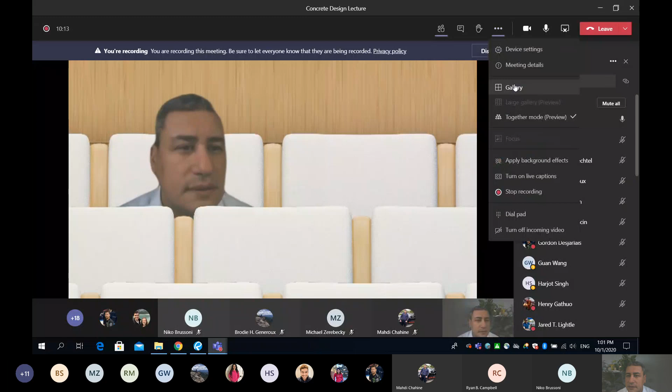Okay guys, let me ask you, does anyone have any question from last class? Does anyone have any question from last class? Guys, you're so quiet, no questions so far? Everything okay? Are you doing well? No questions yet. Why not?

I didn't get you, is it how are you doing? I'm okay. Well, you were just in the movie theater. What happened to the movie theater? I thought I was going to see all your pictures in front of me, but it looks like I'm a student in the middle of the class. Oh, I thought we were at a movie. What movie are we watching? That's not a movie, that's something like an option on MS Teams. You go from here, to gallery, to together mode preview. And I thought when I do that I'm going to see all your faces sitting on a chair in front of me, but it didn't happen. It's only myself on one of the chairs. Thought you were taking us to a movie. That's too bad, another hot date.

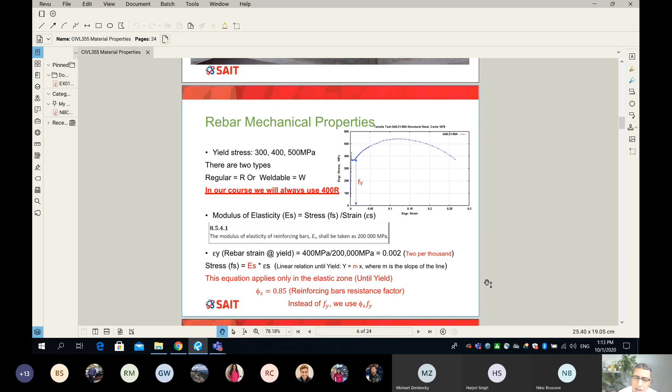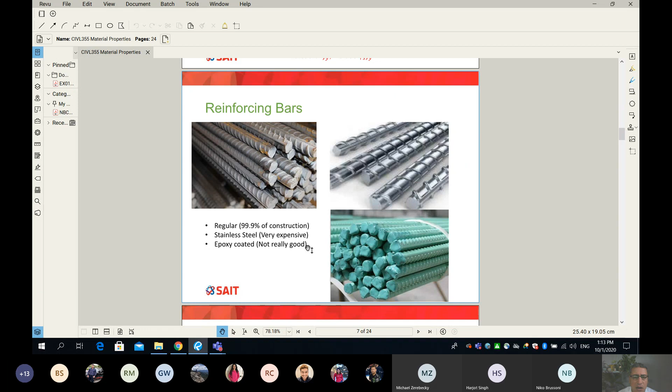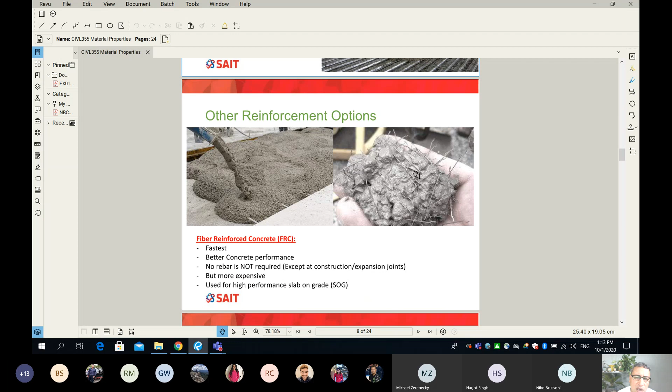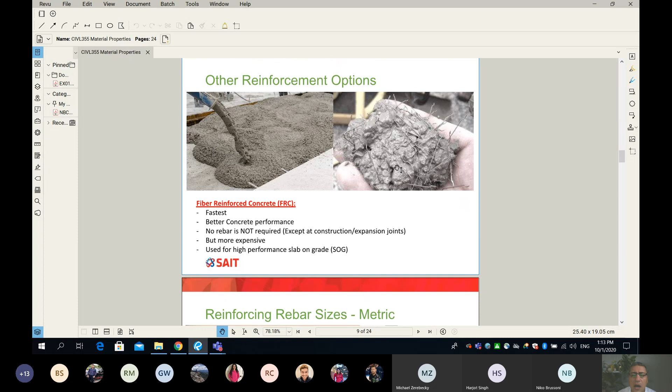I don't want to cover this again. This is about different kinds of steel and which ones are more popular or cover most applications. I've given some clues about where they're used and their advantages and disadvantages. We also talked about the fabric or welded wire mesh and where it's used, and the fiber reinforcing option, which is expensive but very fast because you don't have to lay or tie any rebar. You just place concrete and pour it. Remember, you only need rebar where you have a construction joint or expansion joint. I think this is where I stopped last class, and hopefully we didn't waste too much time just waking you up and reminding you what we covered.

So this table, guys, is very important. You'll use this table in my class probably 1,000 times, unless you're able to remember the numbers, which is very easy. This table tells you the available bar numbers in Canada - metric bars. In Canada, we go from the tiniest one, 10M, in intervals of 5 millimeters, so 15M, 20M, all the way to 55M.

I want to mention something about the 55M. I'm not sure if any of you have seen a 55M bar - this is really a heavy bar. If anyone has experience going to sites and working with rebar, please raise your hand.

Okay, Domenico, let me ask you - keep your hands up, it's okay. It's not a question, just a discussion, so no marks here. I want to ask: if you've been to a site, what is the biggest bar you've seen? What's the largest diameter you've seen on your site?

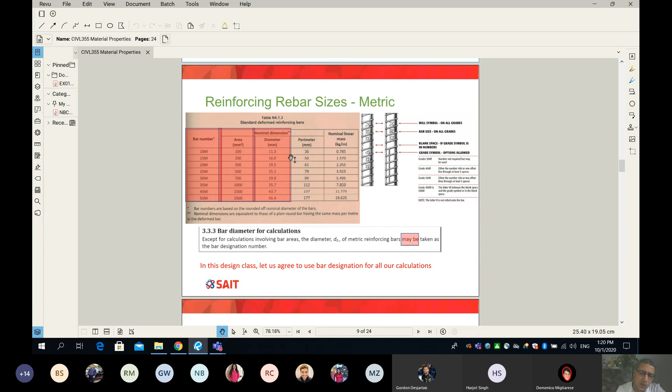Okay, dokie. Let's move on to this table. I'm not going to spend any time on this. This is the rebar in the States, because some of you may work in the States, or sometimes you get some shipment from the state and you need to understand what it means if I say number 3. Number 3 means 3/8 of an inch, which is 9 point something millimeter.

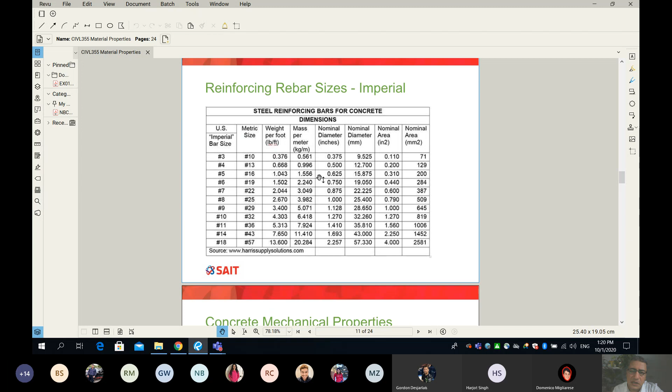Okay, now I guess this is the brand new part. We never came to this point last class. So this, guys, is the same discussion, but it's kind of reversed—instead of applying tension on a piece of rebar, we apply compression on a cylinder or cube of concrete.

We have another machine that only measures the stress, which is the force. Not exactly the force is the stress, but if you measure the force and divide by the cross-section area, you find the stress. But the other machine doesn't measure any strain.

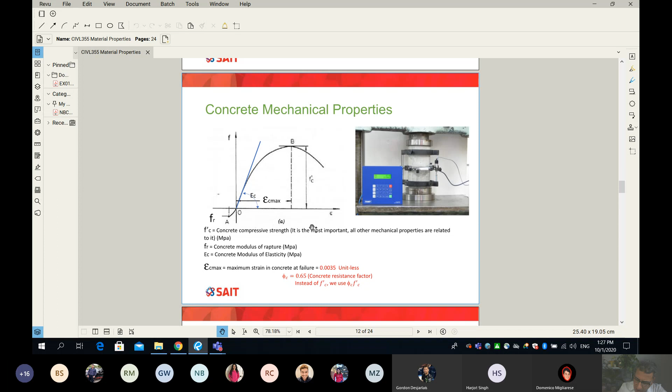Are you guys following so far? I need to hear some noise. Yes, okay dokie, thank you. Anybody else?

Just one? We're listening. Okay, sir, thank you.

As I said a minute ago, the good news is all the mechanical properties of concrete are related to FC dash. Which means if I get concrete FC dash and know how it performs in compression, right away I know how much it can take in tension and all the other mechanical properties.

I'm going to start with the modulus of rupture, coming from the code on item 8.6.4, called modulus of rupture of concrete. The code provides a simple equation, 8.3 on my slide: 0.6 multiplied by lambda multiplied by the square root of F prime C. Everything's clear except lambda.

So what's lambda? It's just below, item 8.6.5, modification factors for concrete density. You know concrete can come in different densities: high density, medium density, normal density, or low density. In that class you learn how to make it high, normal, or low density, and some people did research on that. But take note, in our class we always use normal density.

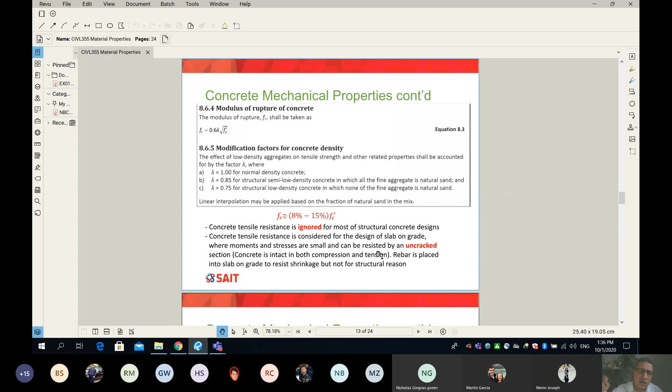Okay, so guys, what I said is already in the slide under statement number 2. Okay dokie, now let's go to the second mechanical property. So the second mechanical property is modulus of elasticity.

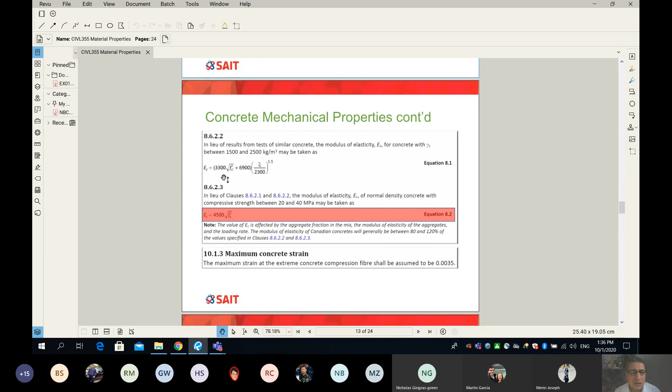Modulus of elasticity, and under 8.6.2.2, the code gives you an equation on how to find the modulus of elasticity E sub C, which you can see is not really a very friendly equation. I'll give you a few seconds to look at it. It's here, so here is the equation.

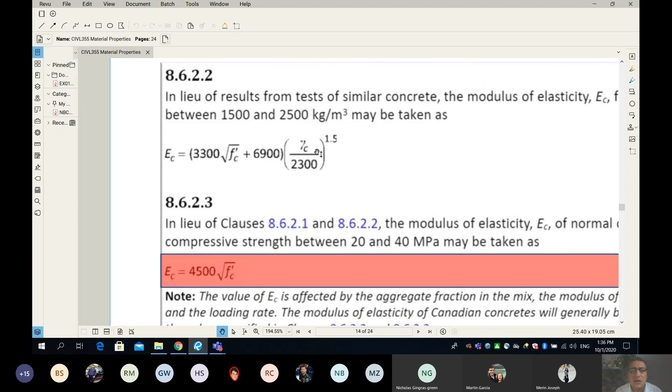Not really nice. It's a function of FC dash as we expect, and also gamma C, where gamma C is simply the concrete density. Okay, so the code says if you want to find E sub C and your concrete is normal density, like our case, and your FC dash is between 20 to 40, then you can simplify this equation to the one I highlighted in red here.

So this one is easier, huh? Just 4,500 square root of FC dash. Okay, now something else you probably want to take a note of.

Okay, anybody, guys? Again, I'll ask you the same question. Anybody has worked on some construction sites? I'm not sure, sometimes you work on a construction site but you don't get to understand and know what the concrete strength is. Like how much, say you're pouring a beam or a grade beam today, or a slab or whatever. Maybe while you're on site you don't focus so much on what's the strength. But let me ask you, if you have this experience, in a normal situation, what will be the typical FC dash?

Concrete compressive strength - have you ever seen 70 MPa or 60 MPa or 80 MPa on site? It depends on what kind of site you're on - residential, commercial, or industrial. Residential is kind of more relaxed on strength, because it's just a house, commercial is sometimes funny.

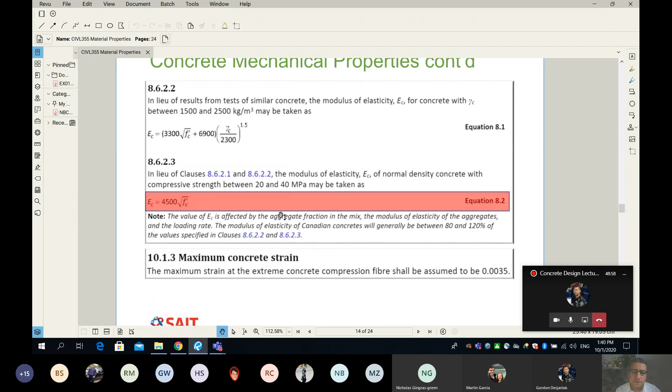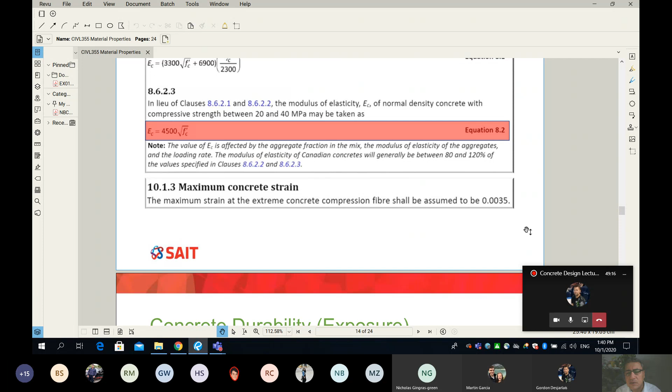Also on the same slide, I gave you this number before, 0.0035. It's not really my choice, this is the code. The code under 10.1.3 talks about the maximum concrete strain, epsilon C maximum, which is 0.0035, 3.5 per thousand. Very important number - we will use it so many times shortly.

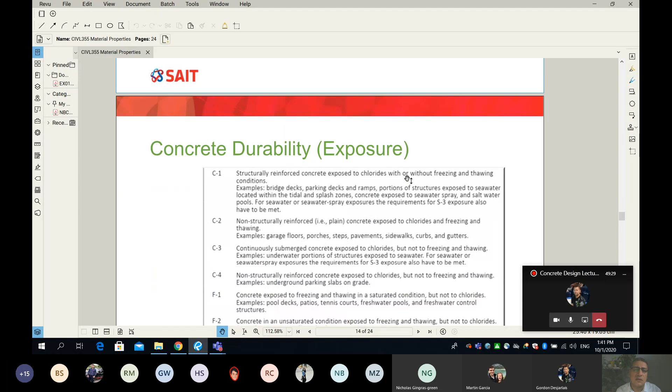Okay, we have a topic - I know you've seen this table before. Anybody want to raise their hand and tell me when did you see this table before? Rudy, go ahead. Mix designing. Absolutely, so thank you so much Rudy - couple of marks for you.

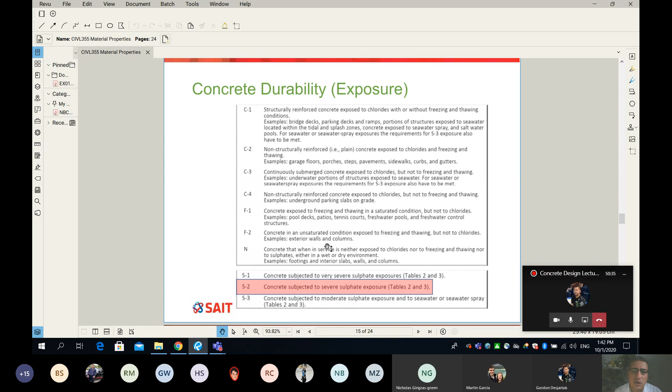So what happened is true, this table was part of the mix design, because when we design mixes we have to look at the durability requirement, and durability in plain English is the long-term performance of concrete. What happens to my concrete after 5 years, 10 years under exposure to chloride, cycles of freeze and thaw, or maybe sulfate. The way we do it is we look at this table, which comes from the code CSA A23.1.

I'm not going to spend a whole lot of time on that because I have other topics to cover, but just a quick reminder because I need that. For example, let's say I'm designing a building, and the building has a wall or a grade beam, and the soil report says your soil has a severe amount of sulfate.

As soon as you hear the word sulfate, it's not really a friend with concrete. It simply interferes and interacts with concrete and creates a kind of gel, and there will be some cracking - it deteriorates the performance of concrete in the long term, so you have to be very careful.

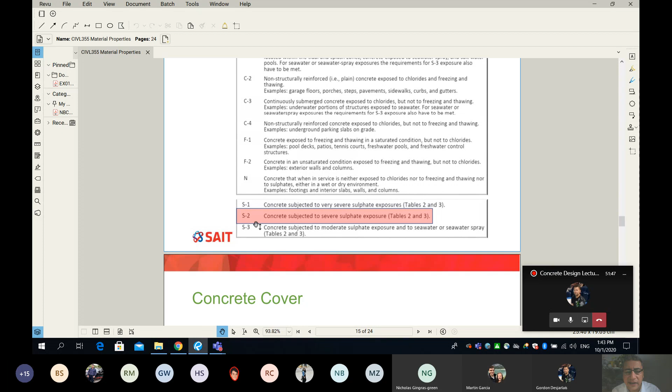So what we do is we look at this table here, and because we got the information that my soil has severe sulfate, then my concrete, which will be in contact with or exposed to this kind of soil, must follow and satisfy the requirement for S-2 concrete. So the exposure here is S-2. Then what do I do when I know my concrete has to be S-2? Maybe you don't feel it much for now, but you will see - here we go. Number one, looks like I need to provide more protection for my rebar.

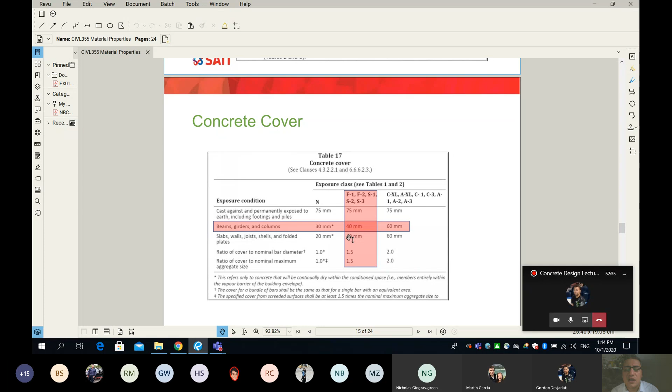So if you have concrete which needs to meet the requirement of S2, and it's a grade beam, as we said, it's a beam here, it means your concrete cover must be 40 millimeters. Look at my row and column - this is how we find the cover. So that's one thing you must do, you must maintain the minimum cover according to the exposure.

What else? You have to keep going and look at other tables from the durability table. So if your concrete is S2, or has to meet the requirement of S2, then number one, your maximum water-cementitious materials ratio has to be 0.45 - it cannot be more than that. In addition, your minimum strength has to be minimum of 32 MPa within 56 days.

Is that clear? Any questions so far? Are you following? Am I going very fast? Am I going very slow? Am I not going? No, you're doing good, good pace. Okay, thank you sir.

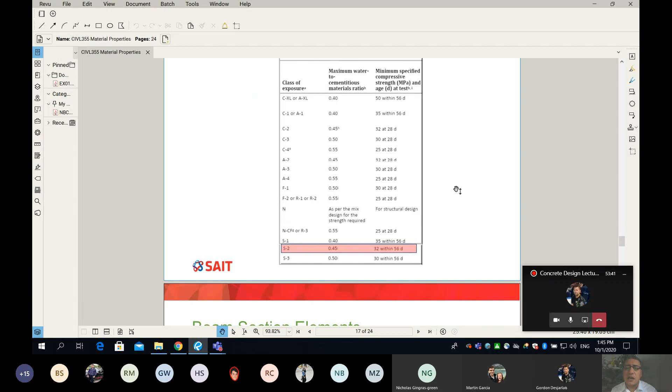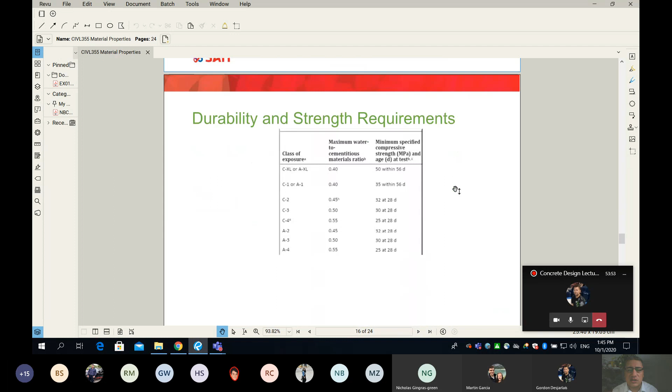My intention is not really to teach you durability in detail, because this is something you learn, but I included it in my slides for your review. So please ensure when you study these slides, you understand what is meant by exposure, how we select the concrete cover, and what should be the minimum strength and maximum water-cementitious materials ratio depending on the exposure.

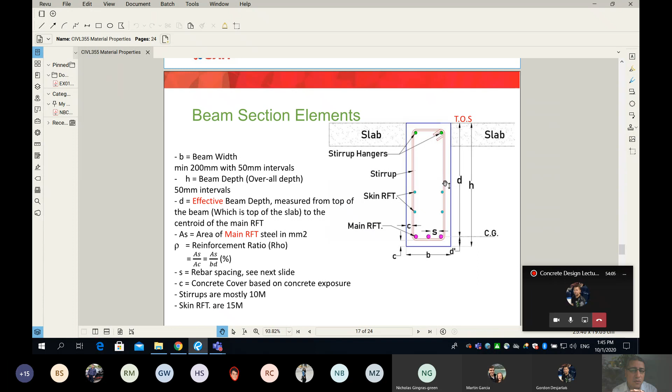Okay, perfect. Now we're coming, guys, we're coming very, very close. I know some of you are bored, but we're coming very, very close to the real business. Okay, now here we go.

We have here a beam section. So what you see on the right is a beautiful beam section that I spent some time on my CAD to produce. I want you to understand all the elements in the beam, because if we go ahead and teach you the design, you need to understand every single letter in this slide - every single letter, not word, letter.

So guys, you can see a typical beam section - I made the border of my beam thick in blue, and I also show you how the beam is attached to my slab. Next, I did kind of an anatomy, so I show you the anatomy of the beam. The beam is concrete, yes, but it has some other elements embedded into your concrete.

Now let's talk about dimensions first. From this point on, I'm going to call the width of my beam B - width of my beam, letter B.

Now guys, when it comes to concrete beams, I know there are so many shapes of concrete beams, but the most common one is simply the rectangular section. Concrete can take any shape, and applying this concept to beam, column, anything, beam can be any shape. However, the most common beam shape is rectangular section, and that's what you will learn in my class. I bet you 99% of the beams that will be cast in place, like cast on site, will be rectangular. Yes, of course, if it's precast, that's a different animal, different business, and it can be any shape like I or T or double T, and we will talk about those shapes later on. But for now, please understand that in Taher's class, the beam will always be a rectangular section.

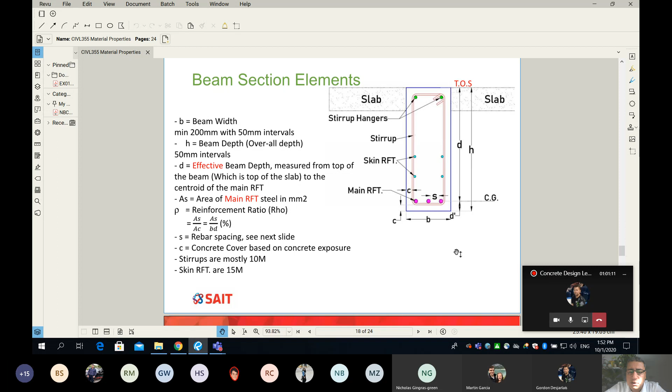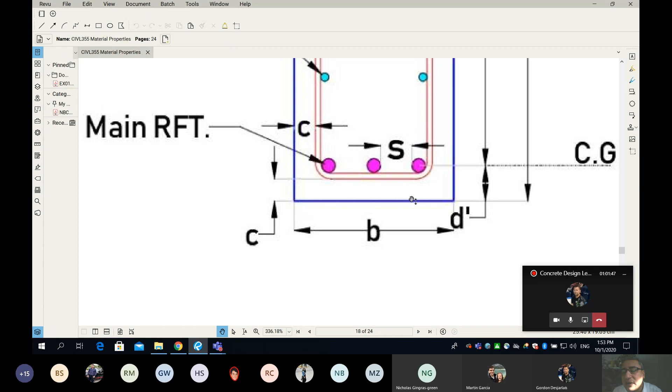Next is something called lowercase s, which is the rebar spacing. I want you guys to look at my screen - let me zoom in to see the S better. S is not center line to center line, rather it's the clear spacing between the rebar. Hopefully you understand why it's important: if this distance is too tight, too small, it doesn't allow concrete to flow in between the rebar, and you will have problems. That's why we have to maintain a specific minimum distance for S. Again, S is rebar spacing.

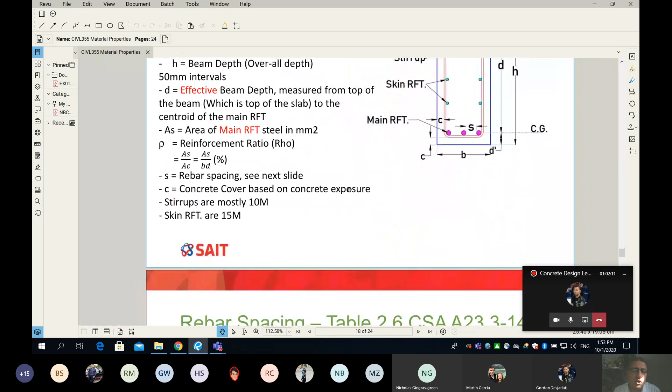Next, you can see it here, something called C, which is concrete cover. It is from the outside face of concrete to the stirrup. I'll talk about the stirrup, and probably other elements in this picture. I guess we finished everything so far - let's move on to the rebar.

So as I said, those rebar at the very bottom in pink, we call them main reinforcement. They resist the tensile stresses due to the bending moment, because concrete cannot do it. Next are the cyan ones - they have a different name, called skin reinforcement, and they serve a different function, a different job in the beam. Those three groups - pink, cyan, and green - all go perpendicular to my screen.

How about the red, which is the stirrup? The stirrup goes parallel to my screen. The stirrup has a function, but I'm not going to say it right now. It has a function which we will deal with later in my course.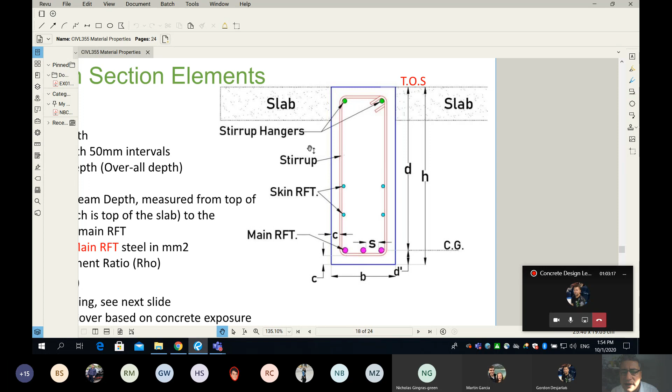The top ones, the green ones, are called stirrup hangers. I don't think I have to mention their function, because simply their function is in the name. They hold the stirrups up and make a box. That's it. Now, something I also want you to take note of.

Stirrups are mostly 10M. I bet, if I ask you, has anybody here with experience on site ever seen a 15M stirrup? And if you did, how many times? Have you seen a 15M stirrup on site, and if you did, how many times? What's the most common? Please confirm, Gord.

Most common stirrups are 15M on commercial and industrial. I've seen far too many of them. No, sir, I disagree. I've been doing design for years. I disagree, 15M... I'll tell you, and you will see that by numbers, okay?

If I cannot convince you, maybe you've seen this in very heavy work, because the stirrups carry the shear. So if the shear forces are so high, then we will need 15M. They were for structural concrete to hold up, like a transfer beam. Those beams were for the support for the LNG project up in Prince Rupert. I can't remember how much propane those things held, but it was gross—I know the supports were like 60 feet across.

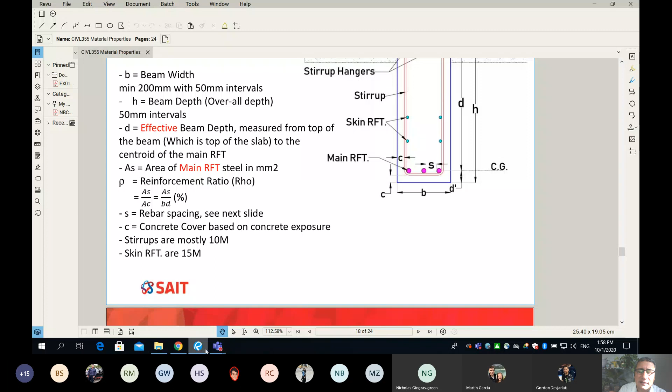So let's go back to our slide. As per this discussion, stirrups are mostly 10M, and the skin reinforcement in cyan is 15M as per the code. So nobody is going to use 10M as skin reinforcement.

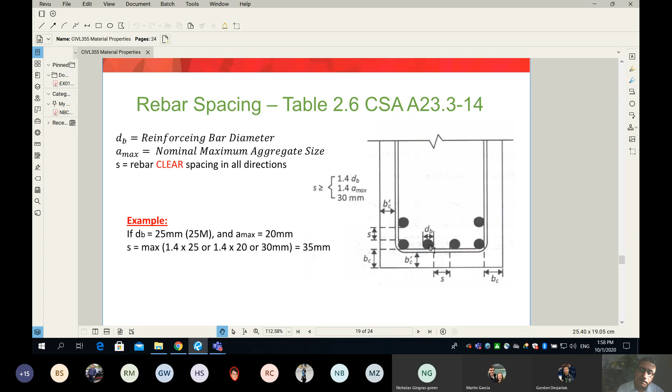What movie are we seeing? I don't know what you're talking about, Michael. I don't know, just kidding, I'm just joking. I like Disney movies. If you... you know what, I like one, not really—the movie that I like has to be an action movie but also has to be funny, and the only person who can do that for me is Jackie Chan. I know, I'm very sad that he is too old right now and doesn't make as many movies as before. But to me, that's the best movie I can watch. And for sure, Jurassic Park and stuff like that, huh?